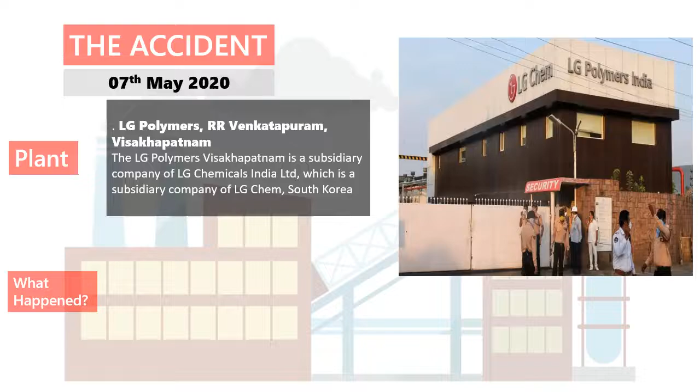Now we should know what had actually happened in the accident. There was an uncontrolled styrene vapor release from one of the styrene storage tanks, M6, which is often known as the Vizag gas leak.

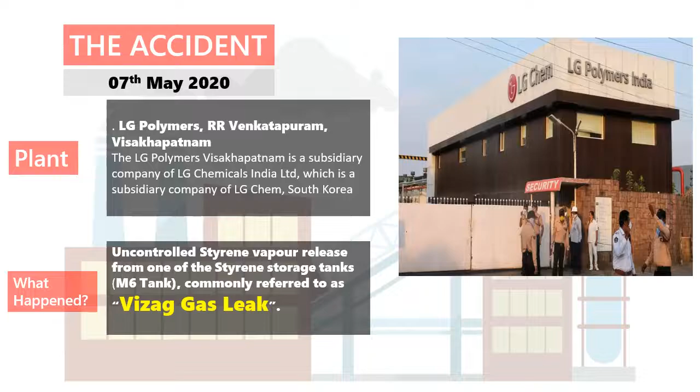See the accident sequence. At 2:31 am, there is no sign of release of styrene vapor as per the recording of the security camera installed in the plant. At 2:42 am, the security camera captured the styrene vapor leak into the atmosphere. The styrene vapor began to escape due to vapor explosion. After a few minutes, at 2:53 am, the vapor cloud formation took place outside the tank periphery.

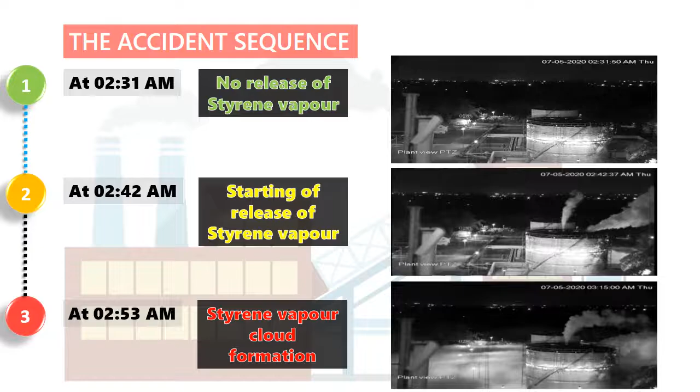Let's come to various facts. This type of styrene vapor release from a storage tank into the atmosphere happened for the first time in India. There were many other accidents that had happened in the past in other countries, but they were less severe than the Vizag gas leak, with very low injury and fatality rates. From the list we can see that most accidents had happened in the USA, followed by Taiwan, Japan and China, but they caused less impact on people and environment compared to Vizag gas leak.

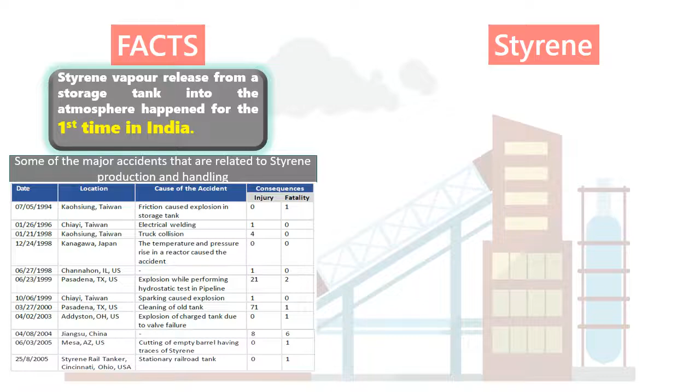Now we will learn some basic facts about styrene and its properties. Styrene is a monomer chemically known as ethyl benzene. It is highly flammable and releases a poisonous gas when burnt. In terms of health effects, acute exposure to styrene in humans results in respiratory effects like breathing problems, asphyxia, mucous membrane irritation, eye irritation and gastrointestinal effects. Styrene is normally used in manufacturing polystyrene plastic, fiberglass, rubber and latex.

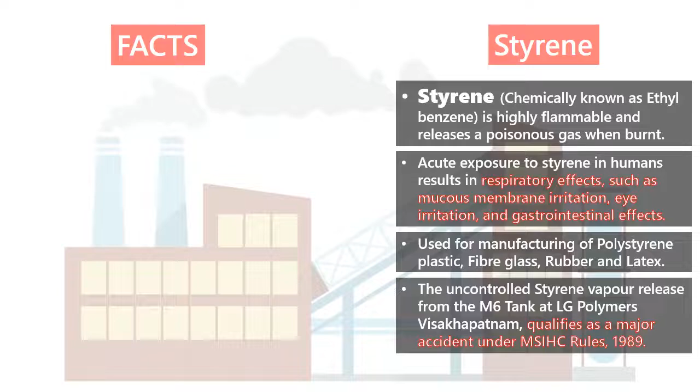As per the accident classification under various statutory laws, the Vizag gas leak qualifies as a major accident under MSIHC Rules 1989, which we have already discussed in previous sessions.

The Chief Minister of Andhra Pradesh, Mr. Y.S. Jagan Mohan Reddy, announced a relief package for the affected people: 1 crore as ex gratia to the kin of the deceased, 10 lakh for people on ventilators, 1 lakh for those hospitalized for 2 or 3 days, 25,000 for people who underwent primary treatment, 10,000 for affected villagers, and 20,000 for each dead animal.

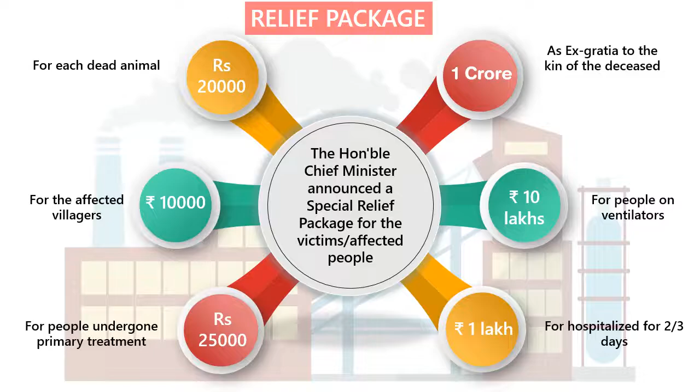As per the deadly effects, 12 people lost their lives, and 585 plus affected people were hospitalized. There was a huge loss of livestock and damage to the environment.

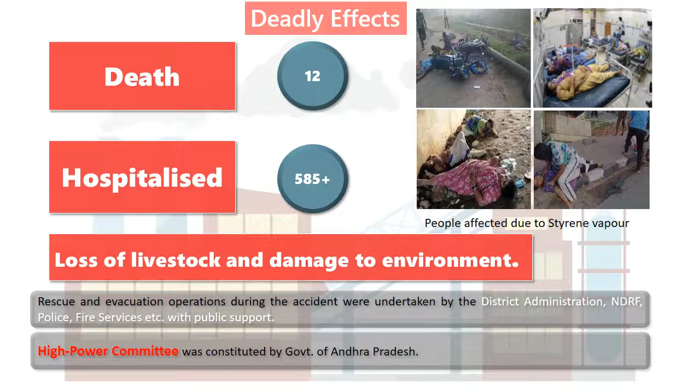It reminded the whole nation about the isocyanate gas leak disaster which had happened in 1984 in the Bhopal-based Union Carbide Company. Rescue and evacuation operations during the accident were undertaken by the district administration, NDRF, police, fire services, etc., with public support. The government of Andhra Pradesh constituted a high-power committee to submit a detailed report.

To understand the accident causing factors, we need to understand a few terminologies like PSM, crisis group, MSDS, and many more. Starting with PSM, it is a tool for identification, evaluation, mitigation, or prevention of chemical releases that could occur as a result of failures in process, procedures, or equipment. There are 14 elements which are applied during the implementation of PSM.

Crisis group is a statutory requirement as per the Chemical Accidents, Emergency Planning Preparedness and Response Rules 1996. This group is formed for managing chemical accidents and their adverse effects. Crisis group is categorized into 4 groups: Central Crisis Group, State Crisis Group, District Crisis Group, and Local Crisis Group. We will have a detailed session on this topic in the next sessions.

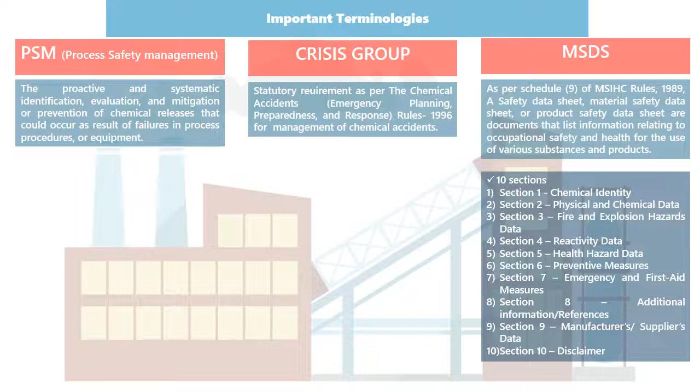MSDS, known as Material Safety Data Sheet, is also a statutory requirement as per Schedule 9 of the MSIHC Rules 1989. It is basically a document that lists all important information of the product regarding health and safety. It has 10 sections which are used to show all important data regarding safety.

TBC, p-tert-butyl catechol, is commonly added to styrene to prevent polymer formation and oxidative degradation during shipment and subsequent storage.

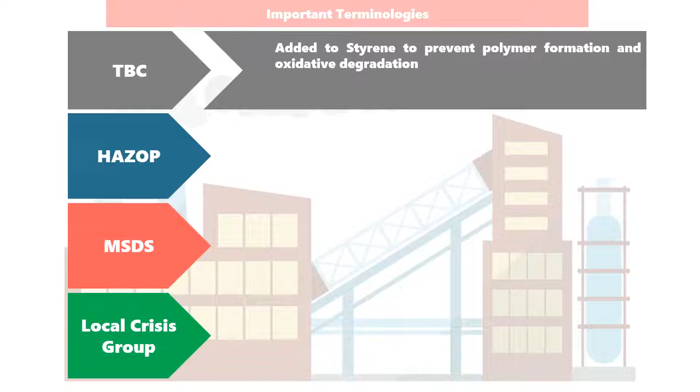HAZOP, a hazard and operability study, is a structured and systematic examination of a complex plant or existing process or operation in order to identify and evaluate problems that may represent risk to personnel or equipment.

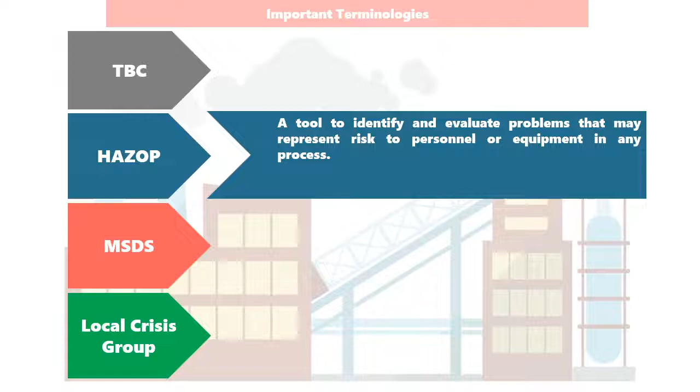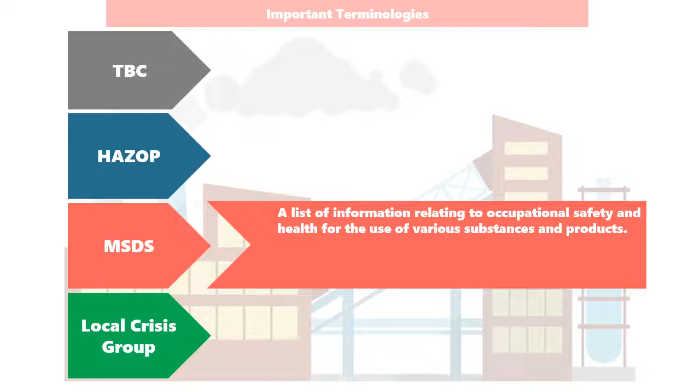MSDS, a Material Safety Data Sheet, are documents that list information related to occupational safety and health for the use of various substances and products.

Local Crisis Group shall be the body in the industrial pocket to deal with chemical accidents and coordinate efforts in planning, preparedness, and mitigation of a chemical accident.

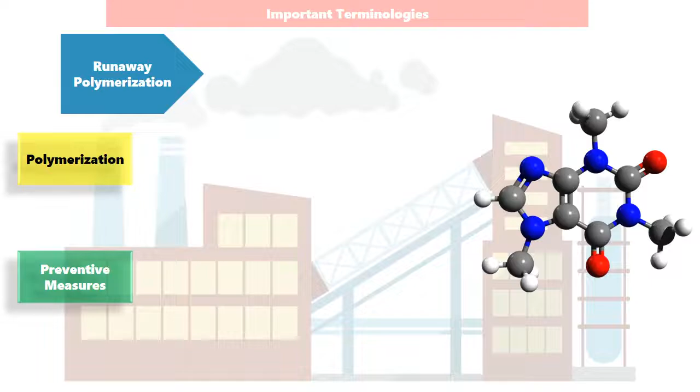Now we have an important terminology: runaway polymerization. It is a potentially dangerous reaction in which monomers combine quickly, at very high speed, producing heat that may lead to an explosion or other hazards.

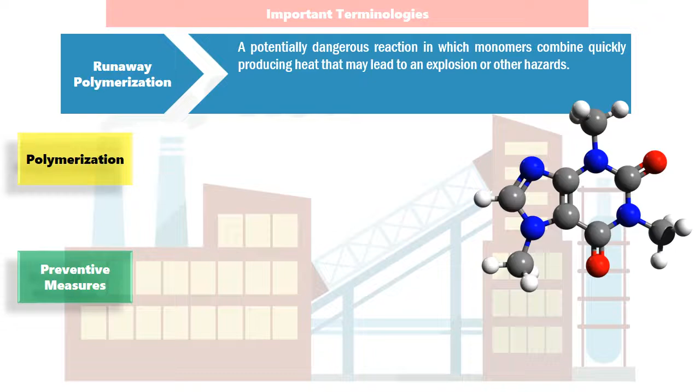Now we will see what is polymerization. Monomers, especially styrene, combine with other chemicals which initiate the polymerization process. The monomers stick together in repeating chains, forming polymers, and this continues until the container runs out of initiator chemicals or available monomers. Now we will see the preventive measures to stop runaway polymerization.

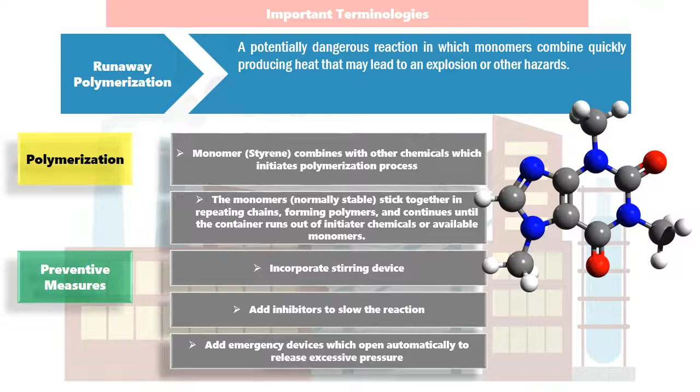Incorporate stirring devices that help in breaking up areas and dissipate heat through the mixture. A chemist may add compounds called inhibitors to slow the reaction, keeping the rate below the point at which it runs away. They can also add emergency devices that open automatically if the reaction pressure exceeds a safe value. These components prevent the reaction vessel from exploding with violent force.

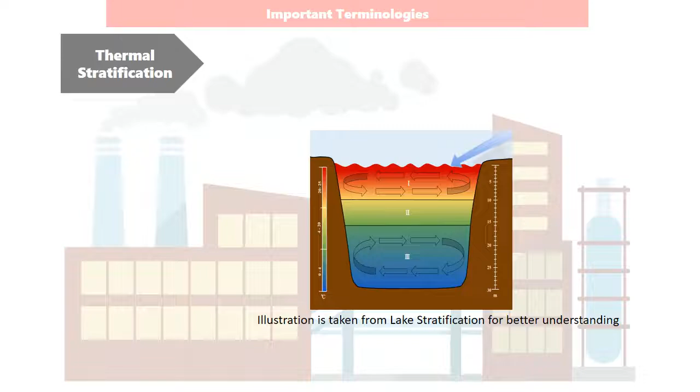Now we will see what is thermal stratification. When styrene is warmer, it gets less dense for each increment in degree Celsius. This allows for thermal layering, where warmer styrene moves to the top of the colder styrene.

We have taken an illustration from lake stratification for better understanding. The topmost reddish layer is the epilimnion, the middle green layer is the metalimnion, and the bottommost bluish layer is the hypolimnion. Here the red zone is warmest and the bluish layer is coldest.

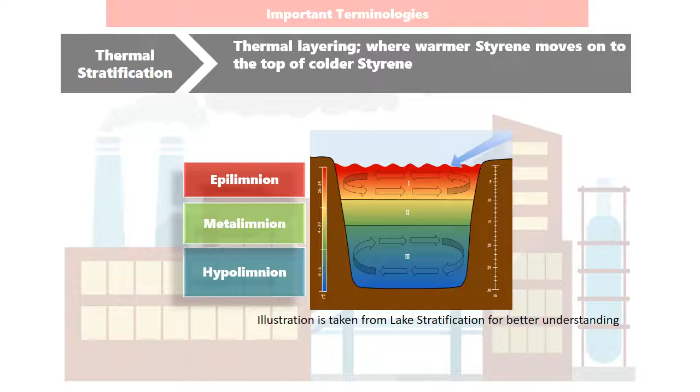Now we will see what were the main reasons for the uncontrolled release of styrene vapor. The runaway reaction was the main reason for this kind of vapor explosion.

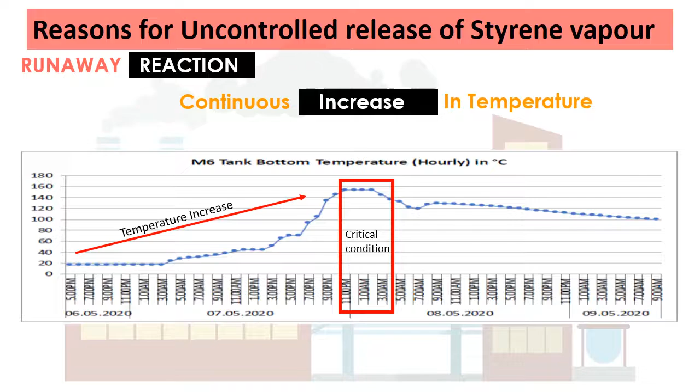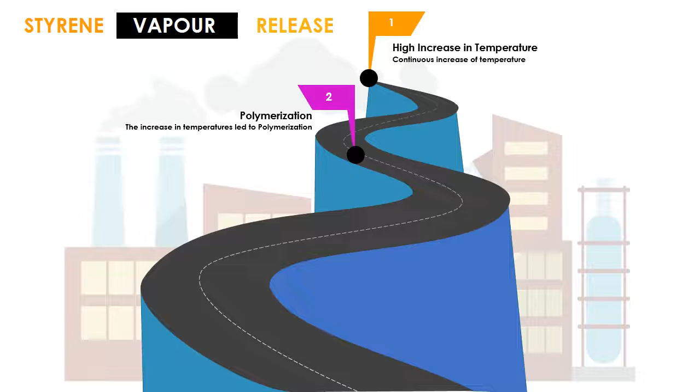We will understand the runaway reaction and the explosion sequence. There was a continuous increase in temperature which led to polymerization. Heat generation due to polymerization finally led to runaway reaction.

Increase in temperature to the boiling point of styrene monomer, which is 145 degrees centigrade, led to boiling of liquid styrene, leading to vapor formation. Further increase in temperature led to increase in the pressure of the vapor, which led to uncontrolled release of vapor from the vents into the atmosphere.

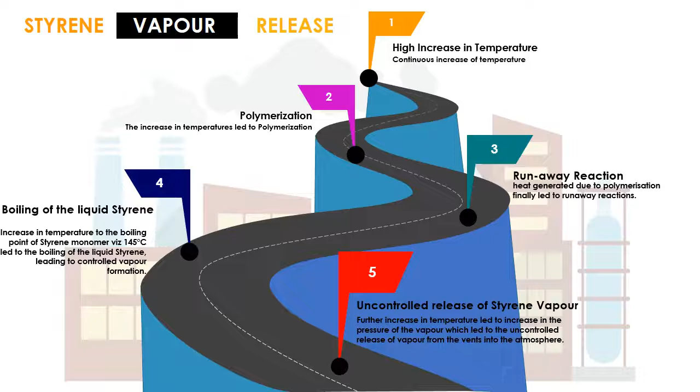Now we will see all the major causes which led to the increase in temperature and finally led to the runaway reaction in the M6 tank and release of styrene vapor into the outside atmosphere.

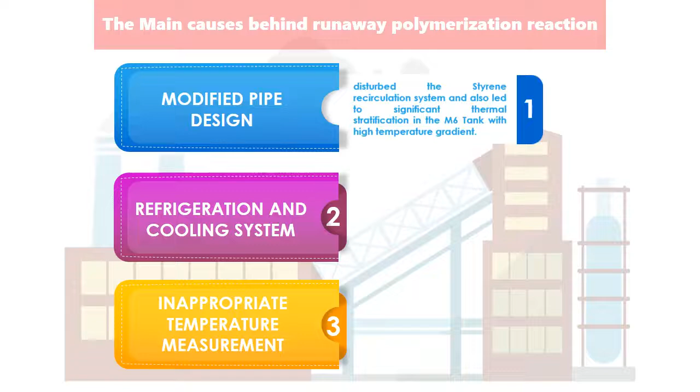The first major cause is modified pipe design. The modified pipe design carried out by December 2019 within the M6 tank not only disturbed the styrene recirculation system but also led to thermal stratification in the M6 tank with a high temperature gradient. Hence, the top level of styrene monomers in the M6 tank experienced much higher temperatures than the bottom layer.

Second is the refrigeration and cooling system. The refrigeration system was operated as standard practice in LG Polymers from 8 am to 5 pm only, on all days, manually. There was inadequate time duration for the refrigeration and cooling system to maintain the temperature of styrene monomer below 20 degrees centigrade in the M6 tank at all levels.

The third reason is inappropriate temperature measurement. The temperature measurement in the M6 tank is restricted to the bottom zone, while the top and central zones had higher temperature. So the temperatures of the top level and middle level were not available at all to detect the temperature rise in the upper levels. Further, the SOP followed by LG Polymers for the temperature limit of 35 degrees was improper.

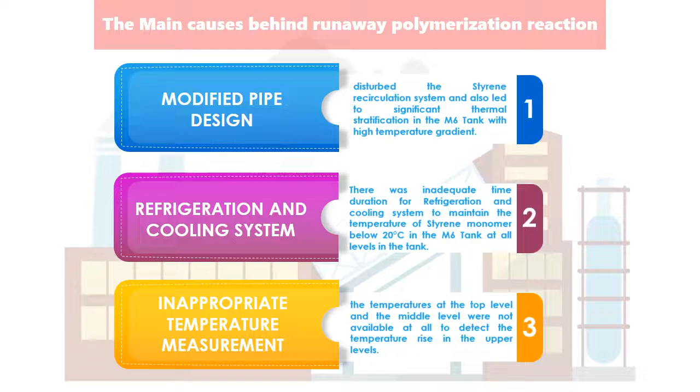The next cause is old design structure and lack of maintenance. The M6 tank was an old tank with an old design structure. The inner side of the tank was not lined. Further, no tank cleaning was done in 5 years, last cleaned in 2015, resulting in the accumulation of contaminants which acted as a catalyst inside the tank, initiating polymerization of styrene, which overwhelmed the inhibition effects of TBC.

The next cause is ineffective, limited TBC available. The high temperatures at the top level of the tank led to thermal radical polymerization. The high temperatures made the available TBC ineffective.

The other cause is the increase of polymer content ignored by company management. The company management had ignored the increase of polymer content from 4th April 2020, and then the sharp rise from 25th April 2020 to 28th April 2020. The management considered polymer content as a quality measure for styrene rather than a safety measure. The early indications of a runaway reaction, shown in the rise in polymer content in the M6 tank, were totally ignored.

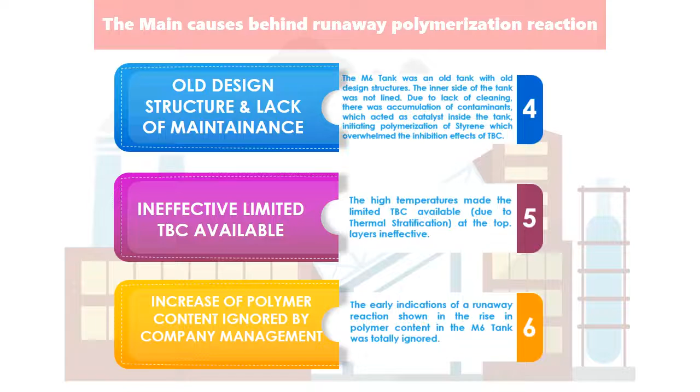The other major cause is lack of temperature sensors. There was only one sensor for temperature, which measured only the local temperature and did not indicate the temperature at the higher level of the tank, as the contents were not well mixed.

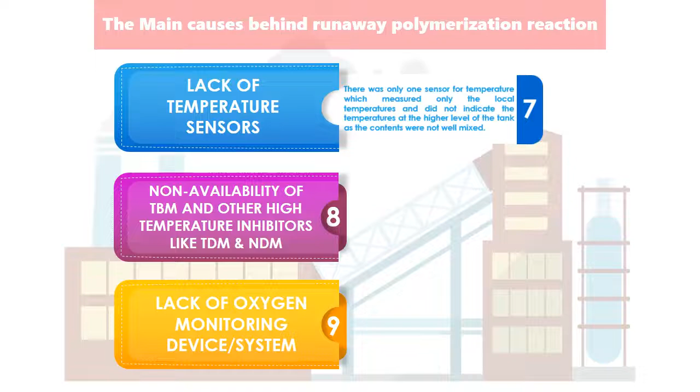The other cause is non-availability of TBM and other high temperature inhibitors like TDM and NDM. The company failed to consider the TBC stratification and measured TBC only from samples from the bottom layer. Further, there was no stock of TBC available in LG Polymers at the time of the accident. The quantity of high temperature inhibitors like TDM and NDM was also limited, which got exhausted after a few hours and failed in preventing the runaway reactions.

The next cause is lack of oxygen monitoring device or system. There was no monitoring device or system in place to measure the quantum of dissolved oxygen in the styrene monomer in the M6 tank.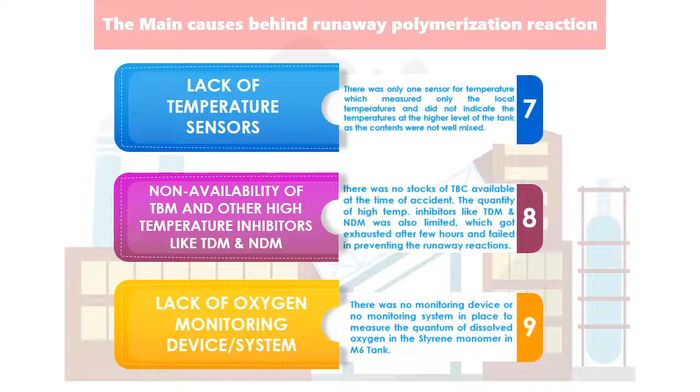Our next main cause is PSM is not implemented. No process safety management system was followed in LG Polymers. The safety protocols were not followed.

Next major cause is inadequate knowledge, skills, qualification or competency. There was a dearth of knowledge and talent among the top, middle and shift management in LG Polymers. Most of the present shift in-charge engineers were not qualified engineers, hence their knowledge and skills were not adequate when faced with a challenge or an emergency.

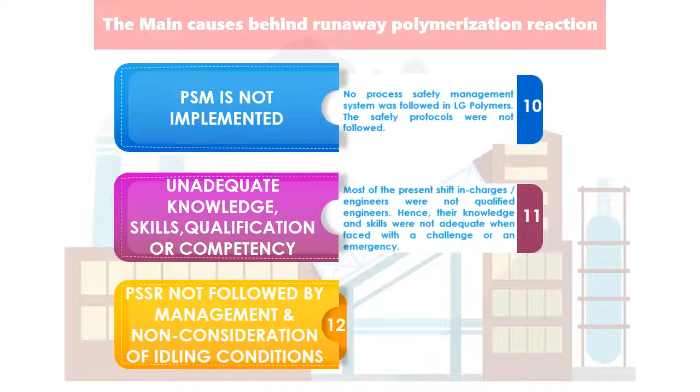Now, the next main cause is non-consideration of idling conditions and ignorance of early indications. LG Polymers was closed during the COVID-19 lockdown period as it is a non-essential industry, and minimum staff were given permission to maintain the factory during the lockdown period. However, the LG Polymer management was irresponsible, as they followed the same SOP as applicable for regular operational circumstances during the lockdown period as well.

They did not consider the idling conditions in the M6 tank. Further, they ignored the early indications in the rise in polymer content. No separate SOP was created for the lockdown and restart operations, and no PSSR, pre-startup safety review, was done.

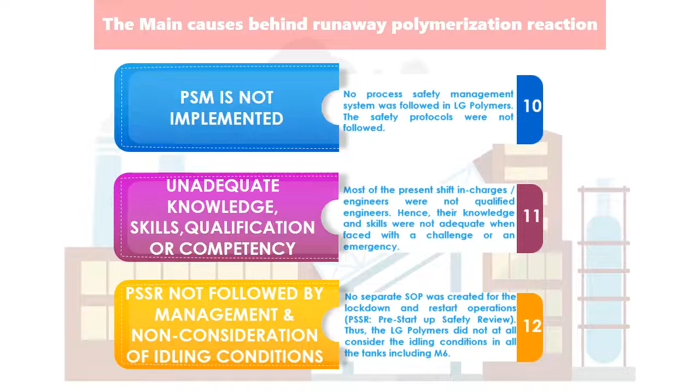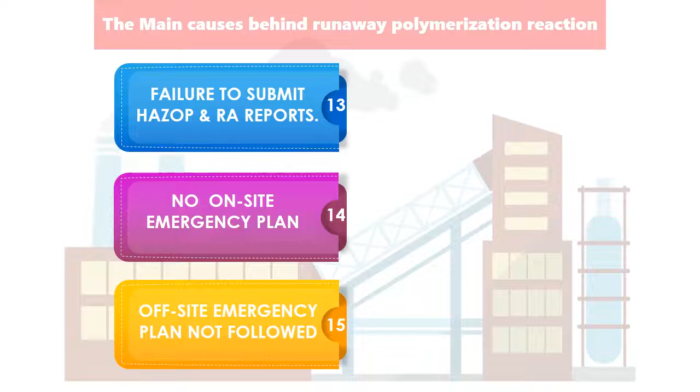Our next main cause is failure to submit HAZOP and risk assessment reports. Other main cause is no on-site emergency plan. The on-site emergency plan of LG Polymers did not take into account any likely scenarios of a styrene vapor release from a storage tank, and such a case was never considered for emergency mock drill.

The other main cause is off-site emergency plan was not followed. Even the siren, which was in working condition and had multiple activation points, including near the factory gate, was not activated at the time of the accident.

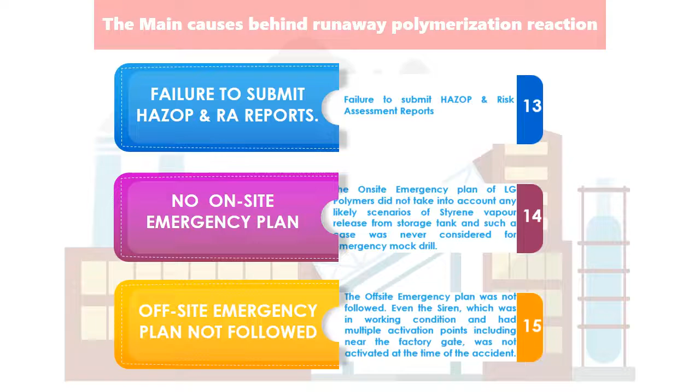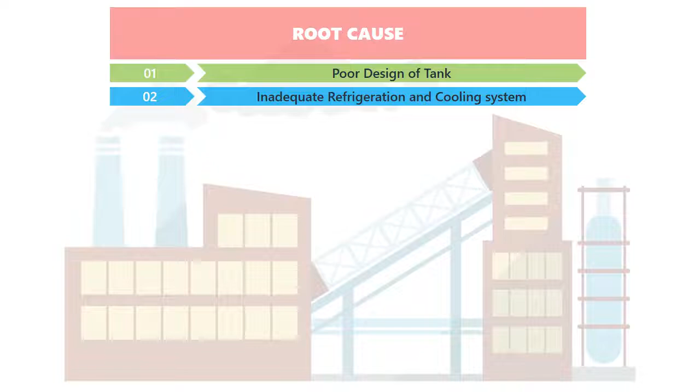Here we are listing all the root causes behind the release of styrene vapor into the outside atmosphere. First one is poor design of tank. Second one is inadequate refrigeration and cooling system. Third one is absence of circulation or mixing systems. Next one is inadequate measurement parameters.

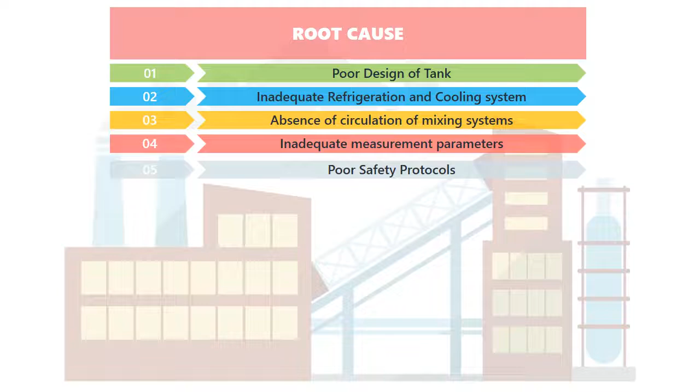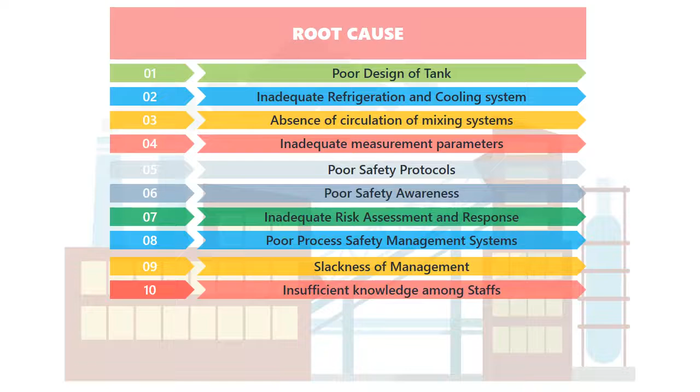Next is poor safety protocols, poor safety awareness, inadequate risk assessment and response, poor process safety management system, slackness of management, insufficient knowledge among staff, inadequate skills, qualification or competency. And the last one is insufficient knowledge of the chemical properties of styrene, especially during storage under idle conditions, and total breakdown of the emergency response procedures.

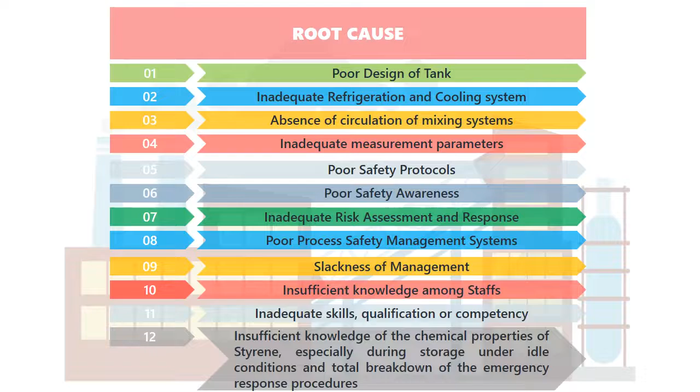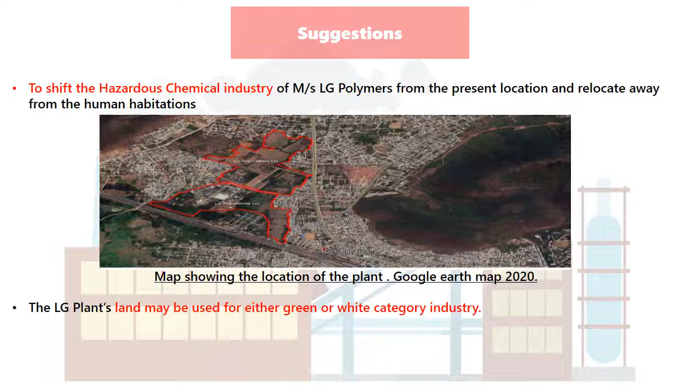To shift the hazardous chemical industry of LG Polymers from the present location, and it may be relocated away from human habitations, preferably in established notified industrial estates. The present LG Polymers industrial land may be used for either green or white category industry, subject to the outcome of environmental clearance.

Now, we will see the technical suggestions regarding the storage, handling and processing of styrene monomer and the emergency response system in case of accident or incident. There must be provision for mixing in case of failure of the circulation system.

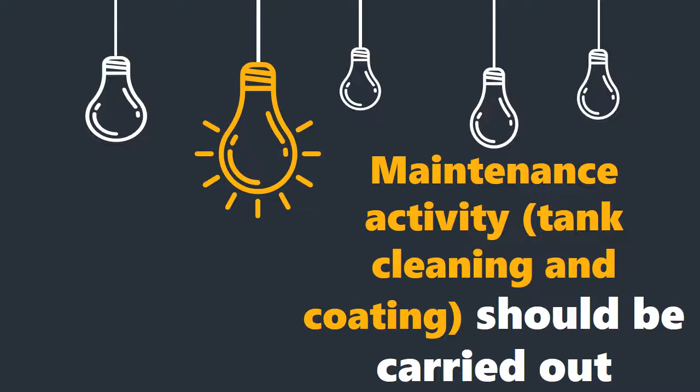The material of construction, MOC, of the tank should be carbon steel with coating inside. Tank life should be clearly defined. Tank cleaning and coating should be carried out once in 2 years. The roof of the tank should be supported with outside structures. The number of nozzles in the tank should be kept to the minimum required.

All styrene monomer tanks should have a flare system or cryogenic system so that there is no styrene vapor release even under abnormal circumstances. This system will also prevent pollution of air.

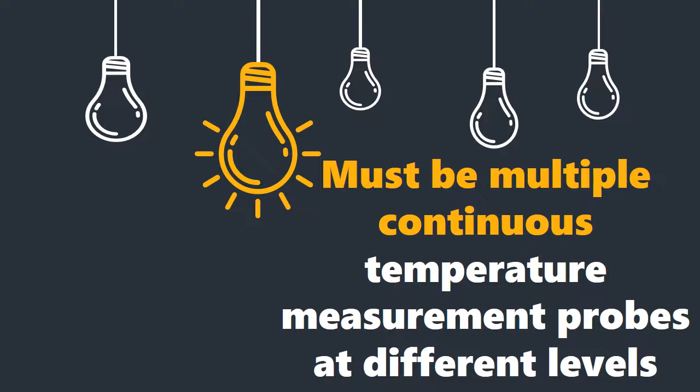There must be multiple continuous temperature measurement probes at different levels of the tank linked to the control room. Temperature monitors and refrigeration system should be interlinked in such a way to maintain temperature of the entire tank below 20 degrees centigrade at any point of time. In case of failure of the operating refrigeration system, a standby refrigeration system shall be started automatically.

Automatic monitoring of inhibitor content in ppm and measurement at different levels of the tank with data recording and alert facility in the control room is essential.

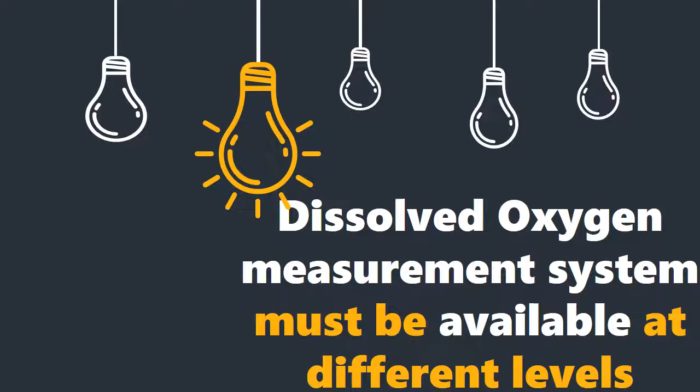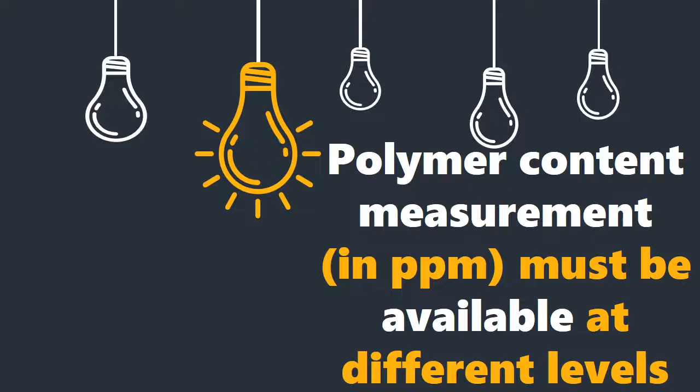Dissolved oxygen measurement system must be available at different levels of the tank and linked to the control room. Polymer content measurement in ppm must also be available at different levels of the tank and linked to the control room. The acceptable range of polymer content in ppm needs to be clearly defined by industry standards.

Use of siren even during minor emergencies should be made mandatory practice. Safety protocols for units or factories storing or processing styrene monomer must include vapor release apart from the possibility of fire and explosion in the emergency plans.

Units or factories storing or processing styrene monomer must undertake an annual safety audit. The PESO, the Petroleum and Explosive Safety Organization, which has classified styrene monomer as B category petroleum, should look into this issue again and classify it as A category, as it needs to be stored below 20 degrees centigrade.

SCBA, self-contained breathing apparatus and other equipment needed for dealing with chemical disasters should be made compulsory for units storing or processing styrene monomer.

Vapor detectors shall be provided at the boundary of the factory, also to indicate in the DCS, distributed control system, about the styrene vapor escape outside the factory premises.